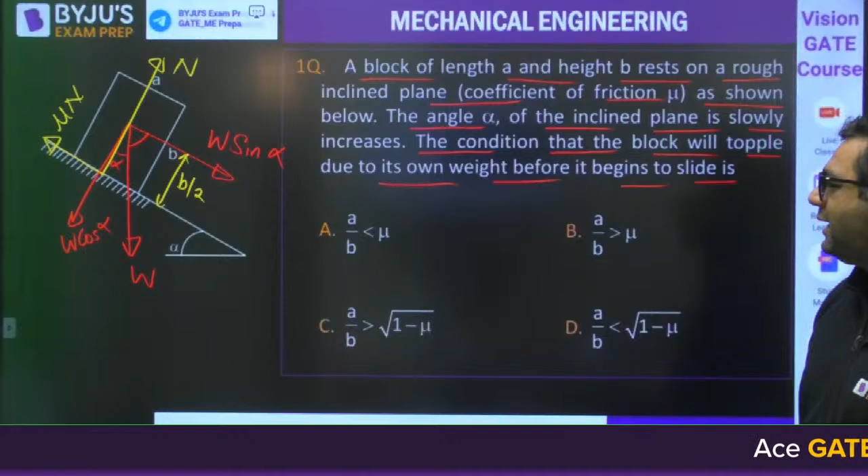So what you need to do, I feel everybody remembers that. Here we can write N is equal to W cos alpha, and mu N is equal to W sin alpha. They are asking you for the condition.

Yes, Papa Kagoda, good morning. Okay, so Mani has given the answer to be B, that is A by B more than mu. What about others? Good morning, bhai Kiran, how are you? Kiran is also saying the answer is B. Okay, let us see guys.

Let us see. So guys, you already know when I divide this, mu will come out to be tangent alpha. They are asking that the block will topple, so you know when the block will be toppling, that is the condition where only this point will be the point of contact. At that point, this is W sin alpha acting like this, and mu N is acting like this.

So you would be saying that is going to be mu n into B, mu n into B or B by 2? Okay, Kiran is saying A. Bengali Baba is saying A is correct answer. A is the correct answer.

So you know that this mu n is nothing but W sine alpha. Let me write it as W sine alpha into B by 2. And that is going to be equals to W cos alpha into A by 2. So when you do this, you would be getting A by B to be less than mu. This will be the condition for which it will get toppled down. So the answer is going to be A, guys.

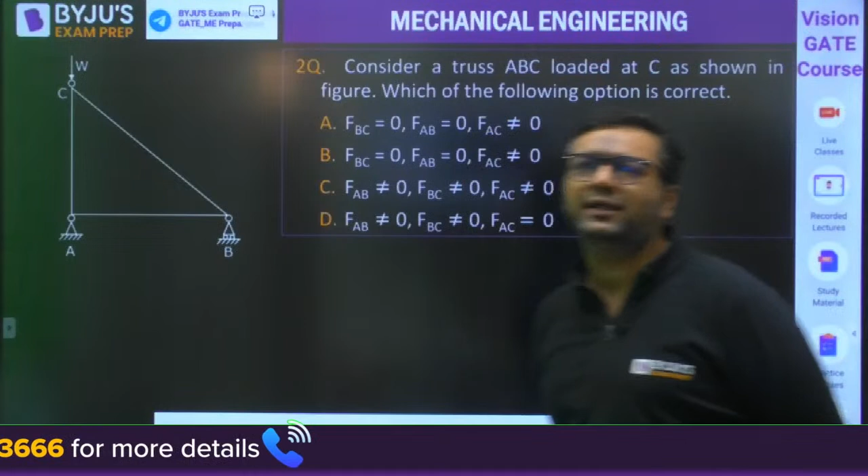Very good, very good. So moving further to the next question, guys. This is from the trusses. After that, we have questions from machine design, strength of material, thermodynamics, fluid mechanics. Every topic will be covered.

This is the second question. Consider a truss ABC loaded at C as shown in the figure. Which of the following options are correct? They are asking you the forces in the member. You need to apply the shortcut. This type of question will be coming in the exam.

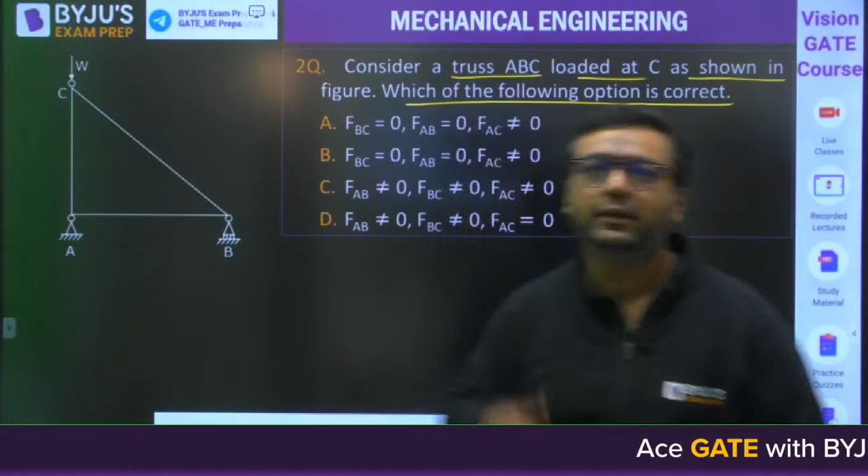Yes, the answer A is correct. Why it is correct, I am telling you. So my dear, you can see that this load W is acting and this is the member like that. So whenever we have this condition, let us consider that you have two members like that. Because in trusses, one member is a force member, every member is a two-force member. So force or member, both can be considered simultaneously.

So my dear, you can consider if this is a member, this is a member, they are collinear, and some other member is going like this. For such a condition, this becomes a zero force member. So my dear, here this will become a zero force member. If this is a zero force member, you know it would be having two components. Like if I assume this force to be like this, it would be having two components, one is this, other is this. This one will be balanced by the reaction. If this total is zero, obviously its components are also going to be zero. So this force will also be zero.

And this W will be handled by this member because in the collinear member the load becomes the same. So if this is W, it would be going to be FCA. So my dear, FAC or FCA is going to be W and all other loads are going to be zero. So the answer for this is going to be A, guys. Is it clear? Very good, Nikhil. Very good.

Moving further, guys. Now this is from strength of material, theory of failure. They are asking for a component subjected to complex loading. The dimensions obtained from different theories of failure are arranged in descending order. Which of the following statements is true? So they are asking you, the dimension obtained will be bigger by which theory of failure?

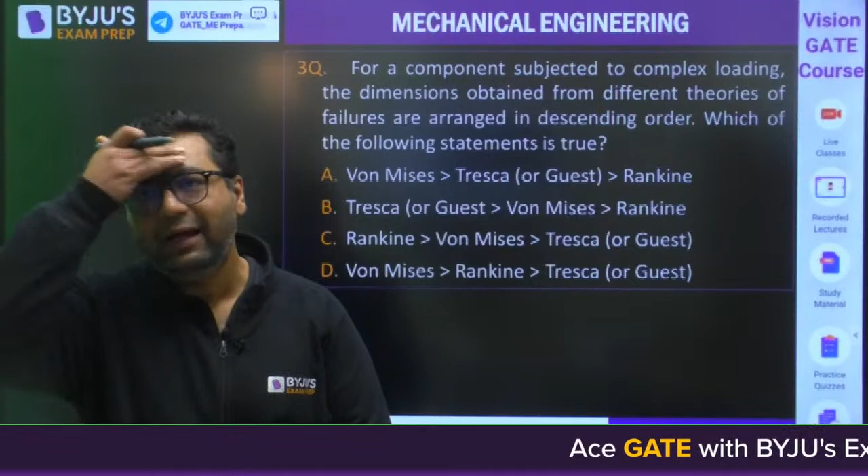Tell me, guys, tell me. Tell me, guys, tell me. Yes, everybody. Nikhil, Mani, Papa ka ghoda.

Okay, guys, so Mani is saying A. Nikhil is saying A. Okay, okay guys.

Whenever you have this type of question, first of all they are asking you the dimension. Which theory will give you the bigger dimension?

Whenever we are comparing von Mises and Tresca, everybody knows that when we go for the failure envelope, that failure envelope is going to be a hexagon. This hexagon is going to be for MSST.

Okay, Bengali Baba is saying B. So when we are talking about this, this is going to be a hexagon.

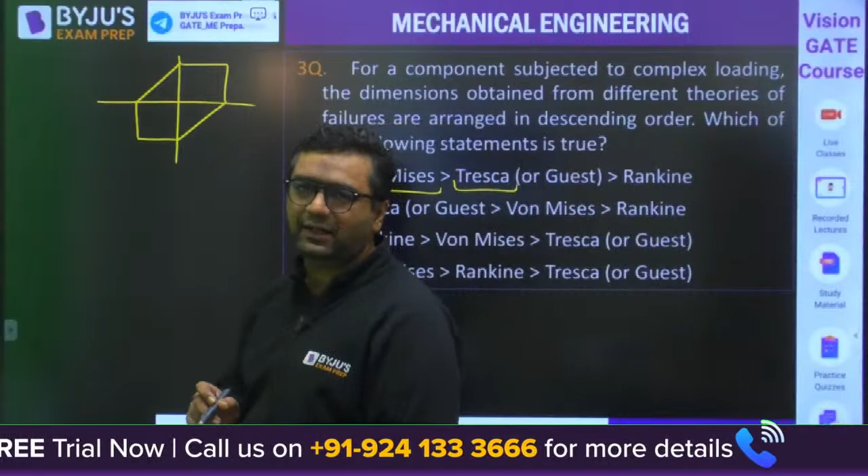You are aware that whenever we go for the second loading, just wait guys. Actually today I am taking the class on PDF, generally I take on PPT. So this is the MDET. You can see the failure envelope.

Is bigger for what? Is bigger for MDET. So MDET failure envelope is bigger than MSST.

So when failure envelope is smaller for MSST, it means it is restricting the loading to a lesser area. It is a more conservative theory. We always say MSST is the safest theory, and whenever we call it, it is uneconomical. So this is safest but uneconomic. And when we talk about MDET, we call it safe and economic.

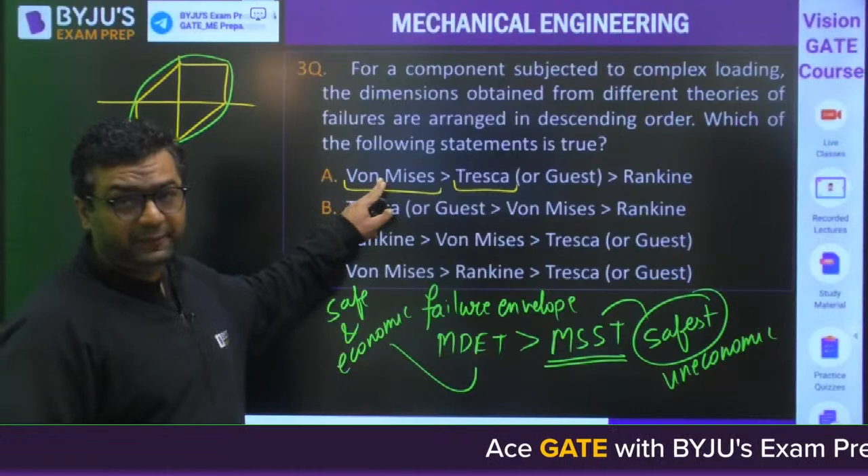If that is the case, it is obvious the theory which is safest will be giving the bigger dimension. So it is for sure that MSST will give bigger dimension than MDET. So von Mises is MDET, which means dimensions given by Tresca are going to be more than von Mises. So the answer will be B, not A.

The similar question I have kept once again, because I knew you would be giving the wrong answer here. So let us see who gives the right answer. Here they are asking the area enclosed by the failure locus on the plot of principal stresses: distortion energy, maximum shear, maximum normal. So which area is bigger, which is smaller? This is just similar to that question.

This is question number 4. I kept it intentionally because BARC people ask this type of question. Because here a calculator is there, some numericals will be there, but time is less. So some such questions will be there where they check your conceptual clarity, because they do major evaluation through interviews only. Here they just check your basics, so concepts would be asked.

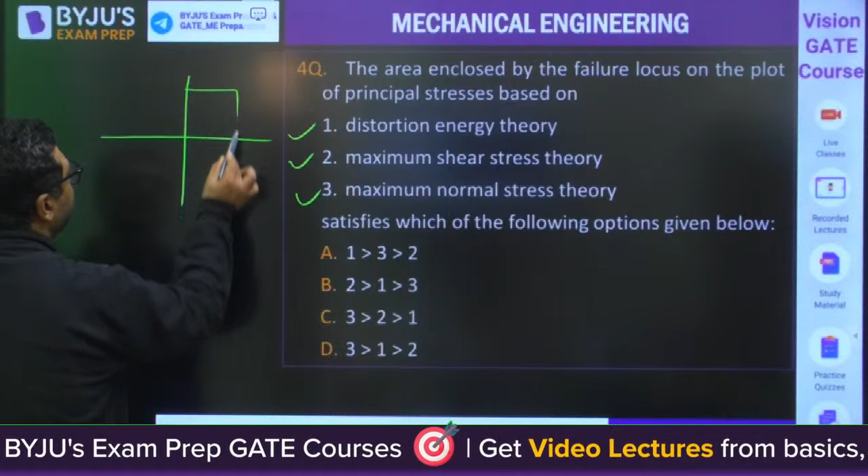Which area is bigger? I have told you one thing, that MSST is a hexagon like this. If MSST is a hexagon, MDET is an ellipse over it. And when you go for MPST, MPST is going to be a square like this.

So obviously MDET and MSST are part of this bigger one. What would be the answer for this? You can see this is for maximum normal stress theory. You must be knowing that MSST is also going to be part of this; the hexagon is like this. So you can see which one is bigger, which one is smaller.

What would be the answer? Nikhil, Mani, Bengali Baba, what would be the answer?

So guys, we will be having the maximum or biggest area for maximum normal stress theory. 3 will be having the highest one. So 3 is having the highest one.

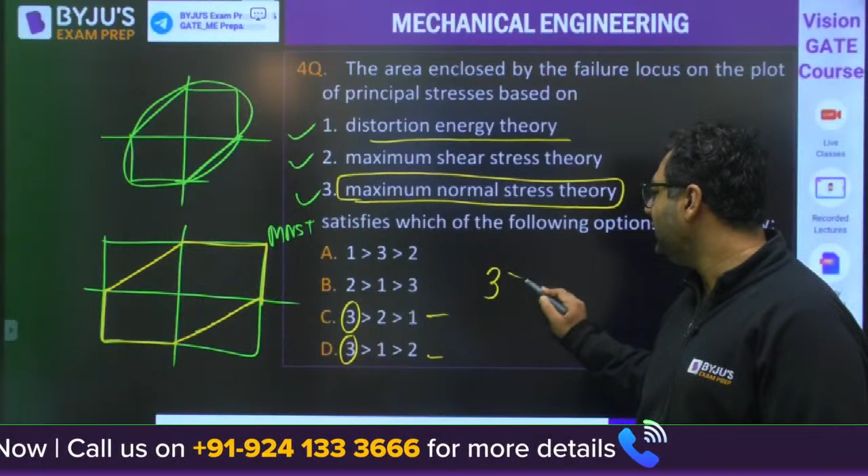So either C or D would be the right answer. Then it will be maximum normal stress theory, so 3, then we have 1, then we have 2. I feel you are not very clear about the theory of failure.

So the answer for this question is going to be D. Moving further guys, everybody understood now? This ellipse area is greater than this MSST area, so that is why the answer will be D.

Okay, now let us move to the next question guys. The next question is very easy from the joints, but here no calculations are involved. You just need to tell which of the bolts will be having the minimum shear force.

This is the figure. So Mani, Bengali Baba, Papa Ka Ghoda, please answer it guys.

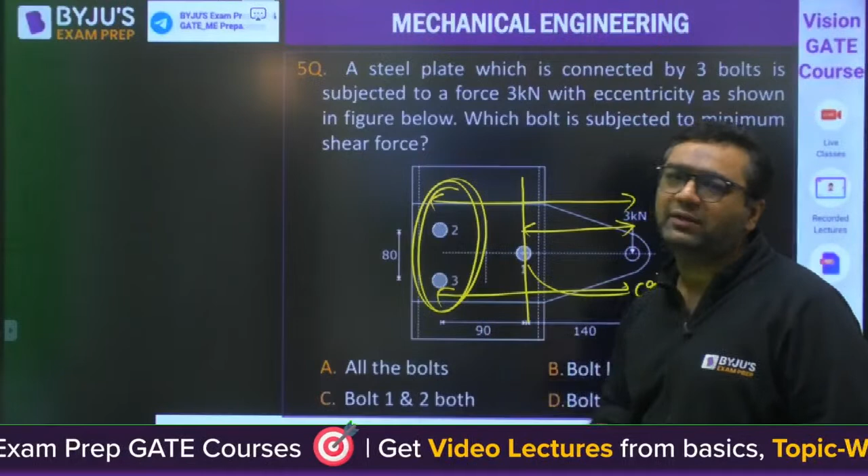And these two are at the same distance. So 2 and 3, they are going to have the less value of stresses. When we do the calculation, we found bolt 2 and 3 would be having the lesser stresses because they are at equidistant. So they will be having equal stresses. And this bolt 1 will be having the highest stress because it is near to the load. So the answer for this is going to be D. Very good, guys. Moving to the next question, question number 6.

Here some calculations are involved. They are asking you the maximum bearing pressure. So they are saying a 25 mm radius, 300 mm long shaft. So we are having a long shaft. Let us say there is a support. This is RA. This is RB. Because they are saying that it is supported at its ends by 2 journal bearings. A load of 2 kilonewton is acting at a distance of 200 mm from the left hand side. And total length is given as 300 mm. So here will be the load acting. So this is 200. This is 100. Because total length of the shaft is 300 mm.

Okay. So they are saying that the length to diameter ratio for the bearing is 1.5. So they have already given L by D is 1.5. So my dear, they are asking you the maximum bearing pressure. How to solve this question? You know there are 2 bearings, one at A, other at B. You will find out the support reaction RA, find out the support reaction RB. Out of that, select the maximum one that will give you the maximum pressure. Maximum pressure will be R max by L into D. So this is going to be the answer.

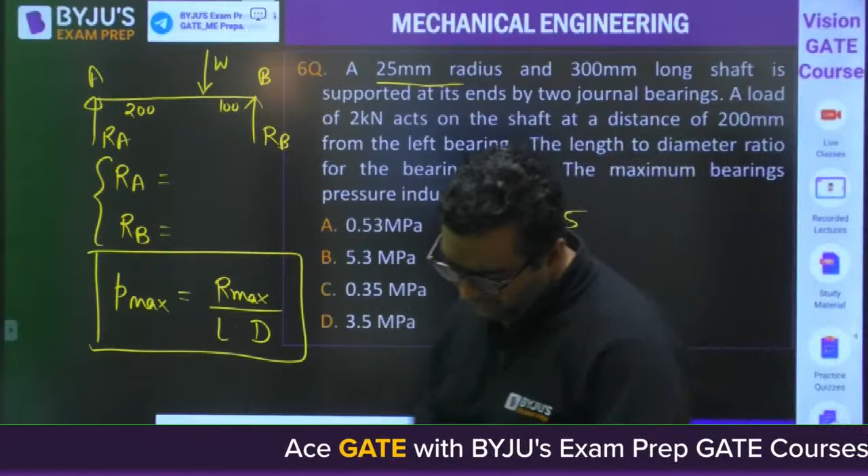What about others? Okay, Bengali Baba is saying 0.35 MPa. C is the answer. Sachin Gautam is saying C is the answer. And I would like to say C is the correct answer. Because when you will be finding out RA, you know that this is 200, this is 100. So it is L by 3, it is 2L by 3. So when you will be writing the value of RA, RA will be W by 3 actually. And this is 2W by 3.

I feel everybody is aware of the shortcut that we write load into distance from opposite end divided by total length. So that will be giving RB to be maximum. Yes, so RB to be maximum. So when you will be going for pressure maximum, RB maximum is 2W by 3. 2 into W, W is given 2 kilonewton, then by 3. Okay, divided by L into D. They are saying 300 mm is the length.

And L by D ratio is 1.5. You can use that also. Otherwise, they have given you the radius also. So you can put the value of diameter and you will be getting it to be 0.35 MPa. I am doing this class on PDF so that I can share the PDF with you.

Very good, Nikhil. Okay, moving to the next question, question number 7. This is a ball bearing question. Question number 7. So I have taken 50 questions from all the subjects, fluid mechanics, thermodynamics, every subject is covered.

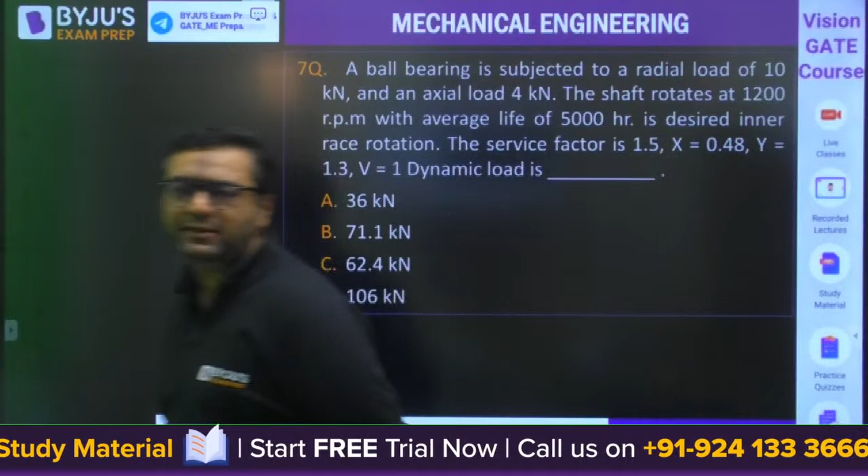So here this time they are asking the dynamic load. You already know the equivalent load is X V FR plus Y FA into S, and C by PE is L90 to the power 1 by K. Yes, K is going to be 3 for the ball bearing. It is going to be 10 by 3 for the roller bearing.

So they have already mentioned it is a ball bearing. So formulas are in front of you. I feel everybody knows that we are going to have the radial load as 10, axial load as 4, shaft rotates at 1200 rpm. Life L90, when you will be finding out, it is life in hours into 60 into rpm divided by 10 to the power 6. This will be the L90 calculation.

So you just need to find out what is the dynamic load. Dynamic load means they are asking you what? C. They are asking you the C. What would be the answer, guys? They are asking you the value of C, dynamic load carrying capacity. And I am telling you frankly, when you give the exam, this question you should attempt in the last because it is a lengthy question.

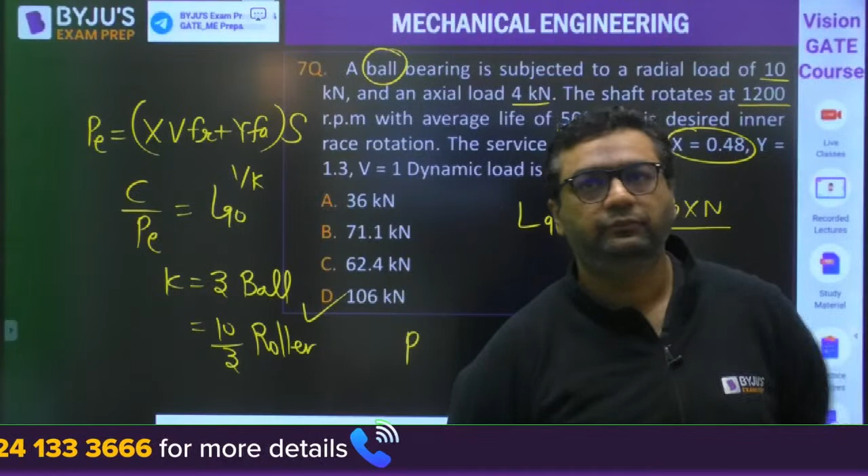We have completed 7 questions, guys. We are still left with 43 more questions. Clear, Mani? Shall we move on? One more question now from the gears.

106.7 kilonewton. So you would be finding out L90 from here, PE from here. And as it is ball bearing, you will select this value. You will get C to be 106.7. Moving further to question number 8. Here also I will give you the formula. Minimum number of teeth is 2 times AR divided by sin square phi. This is the formula for minimum number of teeth.

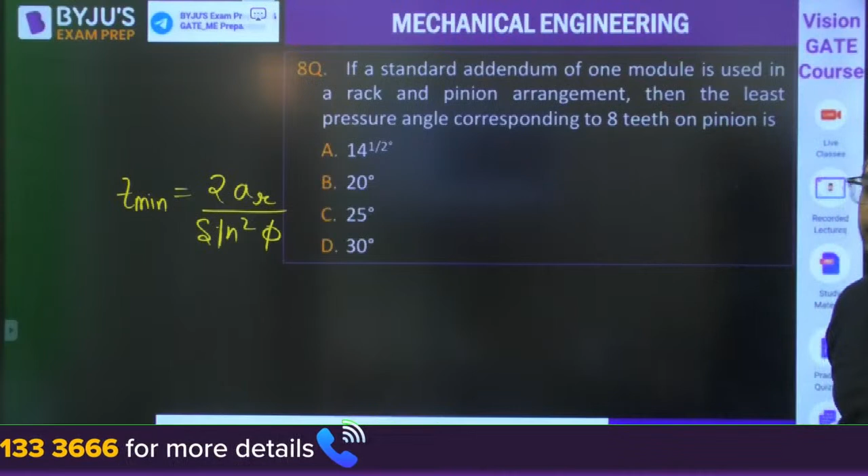Solve it. They are asking you the minimum number of teeth is 8, then the least pressure angle. Find out the phi value, guys. Very good, very good, very fast. Bengali Baba has said the answer to be 30 degree. What about others? Yes, Mani, Nikhil, Sachin.

So AR, they have given you the module is 1. Okay, so when you will be putting this value, you would be getting the phi to be 30 degree. D is correct.

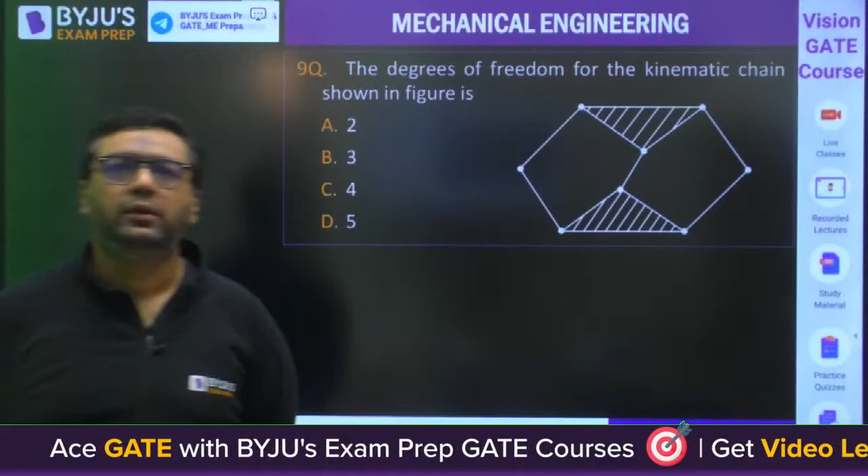Now degree of freedom. Question number 9, degree of freedom. Vinay, are you giving the answer for 8th question or 9th question? Solve it, guys. Now this is a question from theory of machines. After that we have thermal, fluid. Okay. Tangi Siva is saying D. Sachin Gautam is saying 2. Bengali Baba is saying 2.

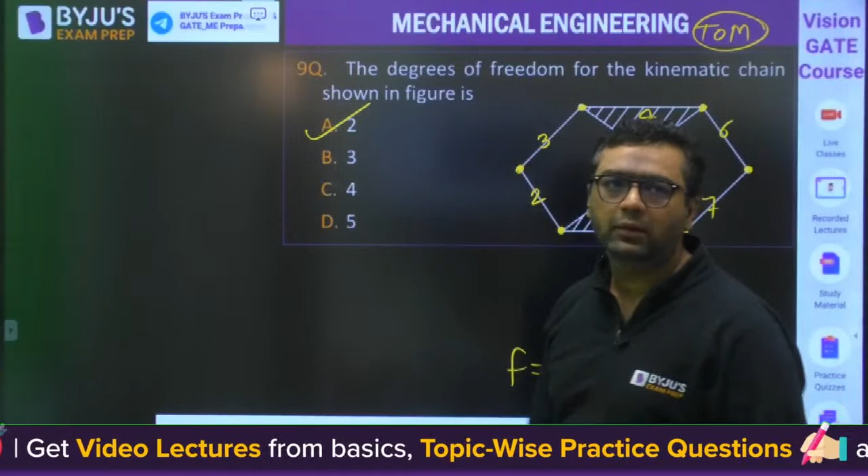Yes. So guys, this is link number 1, 2, 3, 4, 5, 6 and link number 7. So links are 7. Then you can see these are all binary joints. 1, 2, 3, 4, 5, 6, 7, 8. Number of joints are 8. So you know the formula is 3 into L minus 1 minus 2 into J, and higher pair is not there. Answer will be 2. 2 is correct answer. Wonderful, guys. Very good, Nikhil, Mani.

Moving to question number 10, guys. This is from planetary gear trains. So guys, here you can apply the algebraic method. Tangi Shiva, actually I would like to tell you, whenever this question is given, you are saying this is not fixed. You must have seen many times we are applying F is equal to 3 into L minus 1 minus 2J minus H. So whenever you are talking about that, you would be going for the condition of kinematic chain.

In some of the books you may have seen that when one link is not fixed, we will be going for 3L minus 2J minus H. But dear, don't go by that, because when you derive the kinematic chain, then also you are going to get this expression, because you are using J is equal to 3 by 2 L minus 2. You use it, na?

So this is coming from here only. So always use that, because that is given in some of the books. If one link is not fixed, you should use this. But if you see in all the questions till now, whatever they have asked, you need to use this equation to get the answer. Yes, it should be correct when one link is not fixed. But whenever we are finding out degree of freedom, we are generally talking about when one link is fixed. Otherwise, it is of no use.

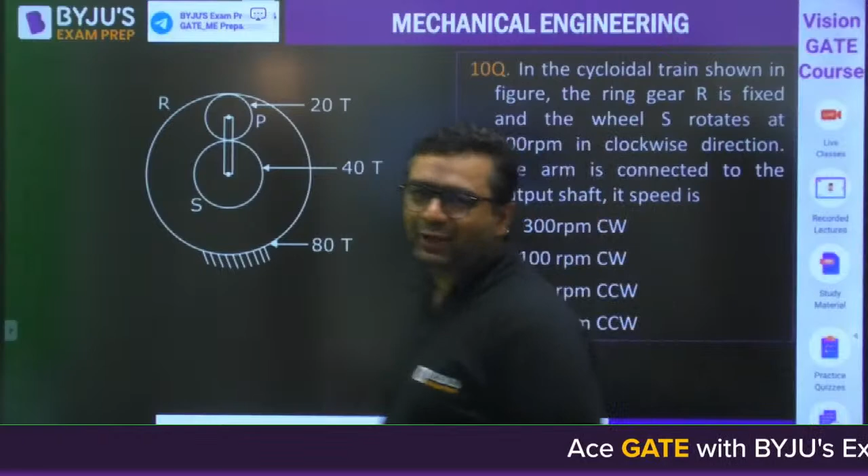Okay, so if you don't have 2 in the option, then you should go by that formula only, because in the PSU exam such kind of things can happen. Is it clear? Yes. I know that. That's why I told you, because many students would be going like that. But as I said, sometimes they don't give it. If they are already showing the connection, sometimes they don't mention the link to be fixed.

So in the cycloidal train shown in the figure, the ring gear R is fixed and the wheel S rotates at 300 RPM in clockwise direction. The arm is connected to the output shaft. Its speed is? So guys, here I would tell you how we can solve it very easily by the algebraic method. So for the algebraic method, there is a formula, like if we are going to have sun and planet in the external gearing.

So we can write (NS minus NA) by (NP minus NA), that will be equal to minus TP by TS. This is one formula. Planet and ring are in the internal gearing: (NP minus NA) by (NR minus NA), that will be equal to TR by TP. Why did the minus sign not come? This is external, this is internal. In external, if this is clockwise, this will be anti-clockwise. In internal, if this is anti-clockwise, this will be anti-clockwise. So there is no minus sign.

Now you know that these NP minus NA are equal. So you just multiply these two equations, and they are asking you NA, they have given ring gear fixed, you will directly get the answer. It is going to be a very easy question then. So Mani has given it to be B. Bengali Baba is also saying B.

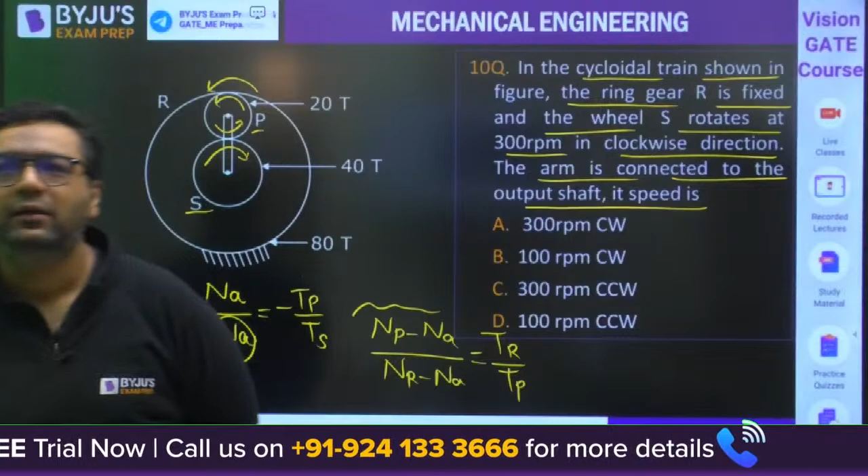So the answer for this is B. First of all, they have said that the sun is rotating in the clockwise direction. So 100 RPM clockwise or anti-clockwise, they are asking for the arm. So you would be getting NA to be plus 100. Plus 100 means clockwise. Okay, when you multiply these, this and this will get cancelled out. I can show you if you want.

So we can write (NS minus NA) by (NP minus NA) into (NP minus NA) by (NR minus NA). So when you equate it, you get minus TP cancelled out, giving TR by TS. You will be getting NA as 100. Very good, Vinay. Moving to question number 11 from flywheel.

Moving to question number 11 from flywheel. Very good. Tangi Siva. Question number 11. 10 questions are over, 40 more to go. And guys, don't worry, easy questions will come.

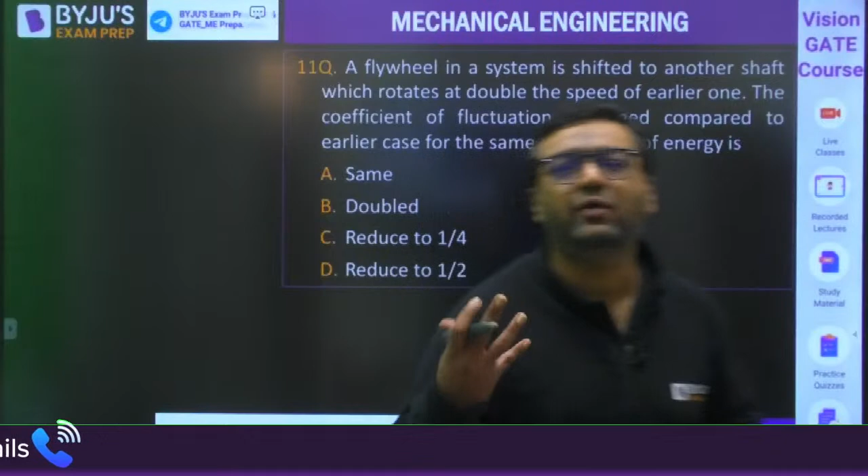I have kept calculative questions intentionally in the initial phase. Because in the paper, I want to tell you, if you find calculative questions, do them in the last, because first it is necessary to cover the entire paper. You would be getting at least 30 questions which you can solve without much calculation. In the rest 20, calculations would be required. Here it is not in your hand, because you see the question which I will be showing, but in the exam it will be in your hand. So go through the entire paper first. Go for those questions first where calculations are not required; you can solve them fast. After that only think about the other questions.

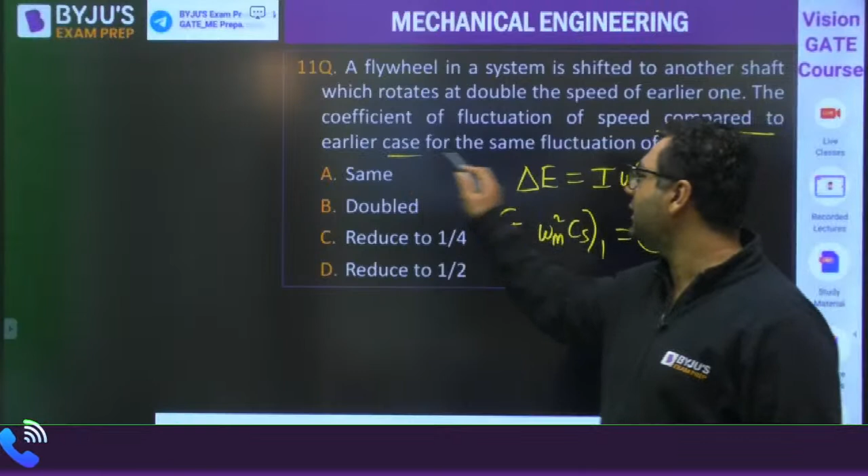Okay, Zakhmi is saying C. Mani is saying C. So guys, for this condition, you will consider delta E equals I omega mean square CS. So you just need to equate I omega mean square CS1 and I omega mean square CS2. Why? Because they have mentioned compared to the earlier case for the same fluctuation of energy. So my dear, delta E is the fluctuation of energy.

So you know, as the flywheel is same, I will get cancelled out and you would be getting it reduced to 1 by 4, because omega 2 is going to be 2 times omega 1. So CS2 will be 1 by 4 of CS1. So answer is C. Very good.

Moving to question number 12, guys. This is from CAM. This is also a famous question from CAM. So now questions from theory of machines are going on. We have seen questions from machine design, engineering mechanics, some from strength of materials, some more will come from strength of materials, fluid mechanics, thermodynamics. Solve it, guys. What would be the answer? Question number 12.

Easy question. They're asking you jerk. You just need to differentiate it 3 times. Differentiate it 3 times.

Hello Abhishek, how are you? Okay. So Bengali Baba has said answer to be C. C or A? Okay, Tangi is saying B.

So dear, first of all, they have given you X = 10 theta + 120 theta square + 1500 theta cube. First of all, let us differentiate dx by dt. Then you would be having dx by d theta into d theta by dt. So the answer will be 10 plus 240 theta plus 4500 theta square, this is 240 into d theta by dt. Then this is going to be d square theta by dt square. Okay, I have done some mistake.

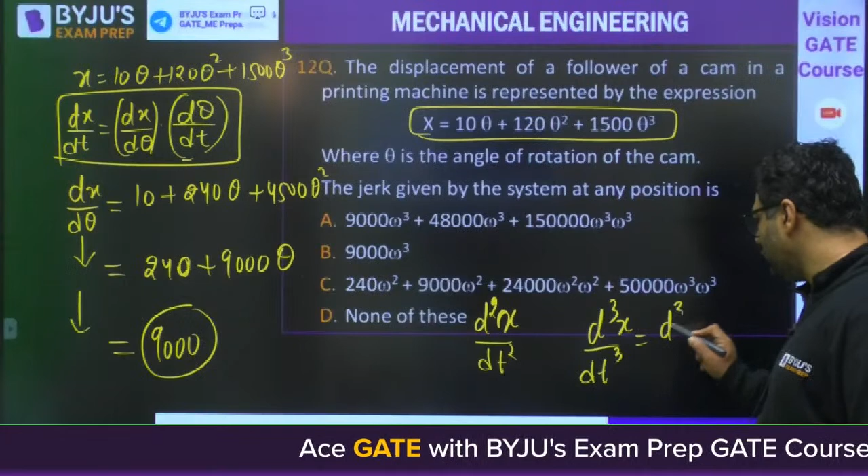So you are going to have 9000, and dx by dt is the velocity. To get the velocity, you have written dx by dt. To get the acceleration, you will write d square x by dt square. And to get the jerk, you will write d cube x by dt cube. So you would be getting d cube x by d theta cube into d theta by dt cube. This is nothing but omega cube, and this you have got 9000. Answer will be B for this.

Very good, guys. Moving to the next question, question number 13 from vibrations. You are doing nicely. Still many questions are left. You can also count your marks, how many questions you are doing correctly. Out of 50, if you are scoring 35 plus, you are on the safe side.

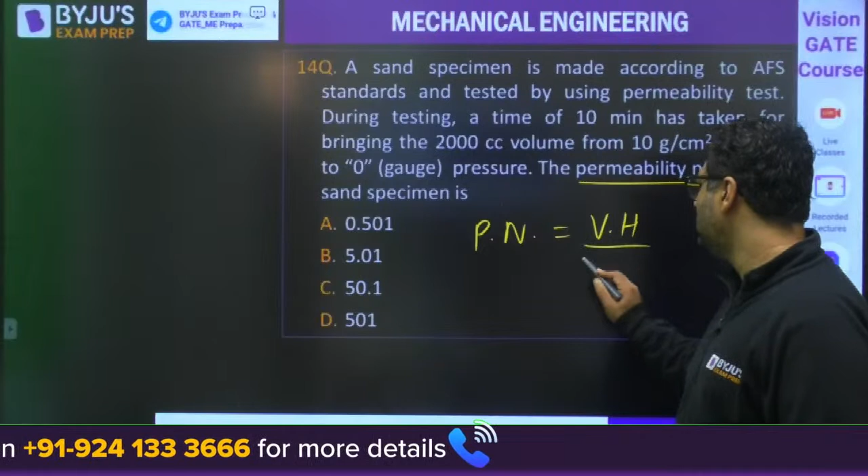Very good, guys. Moving to question number 14. This is from casting. Now production is coming. They are asking you the permeability number. I feel everybody knows permeability number is given as VH by PAT. Try to solve it.

Question number 14. Still left with 36 questions. So if you are getting 35 out of 50, you are on the safer side. So count your marks, how many questions you are doing correctly, and at the end, if possible, you can disclose. If you don't want to disclose, no problem. You can disclose separately also to me.

Yes, guys. They have given the volume of air to be 2000 cubic centimeter. They have given you the height or not? If they don't give, they mention AFS standards. Then diameter and height of the cylinder is 5.08 centimeters.

Yes. So Bengali Baba is saying 5.01. What about others? What about others? This is question number 14. Yes. What about others? Nikhil, what you say? Mani, what you say? Tengi Siva, what you say?

Permeability number. So my dear, it is volume of air in cubic centimeters, height in centimeters, then delta P in gram per centimeter square. A is pi by 4, 5.08 squared. TF, time required to fill the cavity, they have mentioned it as 10 minutes. Yes, that would be your answer. And 5.01 is correct. You would be getting B.

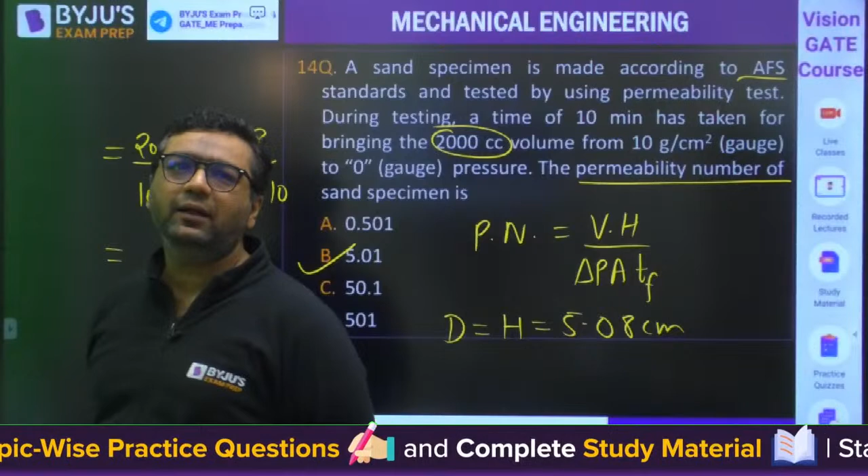Are we getting 5.01? Mani, you are giving the answer when time is 1 minute. When time is 10 minutes, answer will change. I told you that questions have been changed. They are not taken as it is. Okay. Answer is B for this. So moving to question number 15.

This is a question where no calculations are required. They have given the material INVAR, which you have seen at two places. In strength of material, when you were studying thermal stresses, you knew the alpha value for this is 1.2 into 10 power minus 6 per degree Celsius. And then you also have studied it in metrology. There, when you were talking about the gauge material, you were using INVAR and ELINVAR. They are preferred there also.

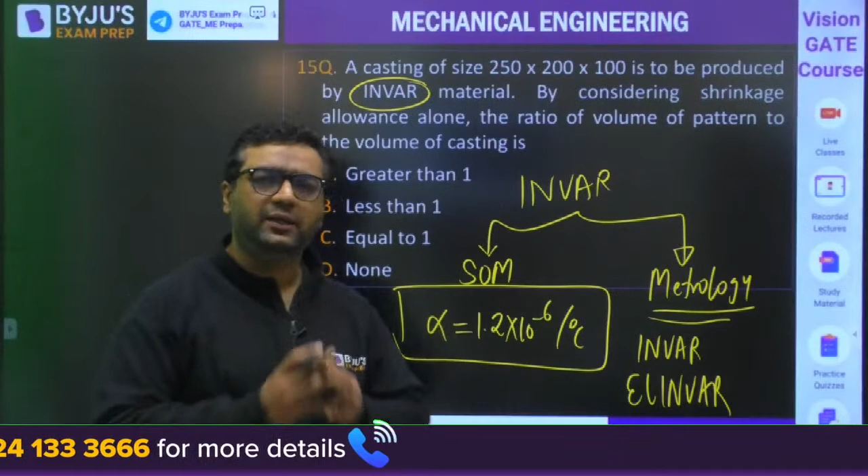Everybody knows that INVAR is having very less value of alpha. Because of that, expansion is not going to be much higher. Contraction is not going to be much higher. So shrinkage allowance is not required. That is why it is going to be equal to 1. C is the right answer. Moving to question number 16 from production.

Very good. So the same like we are writing for INVAR, the similar thing is there for one more material that you need to tell me. What would be the answer for question number 16? This is from welding. They are asking the most suitable for manual metal arc welding.

Some of you may be thinking, sir, you are taking all the subjects. अरे भाई हमने भी एग्जाम उस समय पे निकाले हैं तो सारे सब्जेक्ट पढ़े ही थे. मे बी अब पढ़ाते पढ़ाते we are majorly concentrated on some subjects. But at your age, we also have studied all.

Okay, what would be the answer for this? Kumar S is saying A. What about others? This is a very good question. For manual metal arc welding, you know there is a problem of slag inclusion. To solve that issue, we want the change of current, di by dv, that value should be minimum.

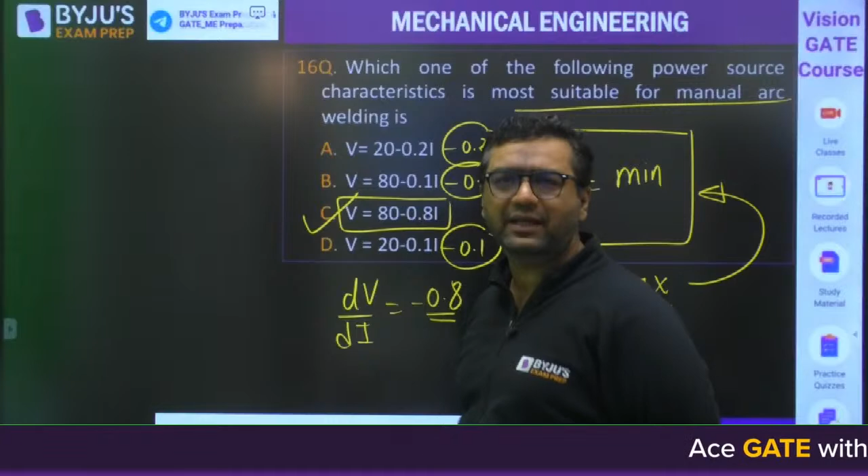For manual metal arc welding, we want... Bengali Baba, you are correct, highest in steel, but we were looking for the minimum. So like INVAR, I was asking which is the other material where we have less value. Don't worry, I will tell you at the end. So answer for this is C.

Everybody understood? In manual metal arc welding, you use a drooper, constant current transformer. Why? Because for more change of voltage, the change of current should be lesser. That means dv by di should be maximum and di by dv should be minimum. So answer for this is C. Clear to everyone? Moving to question number 17. This is a metal cutting question.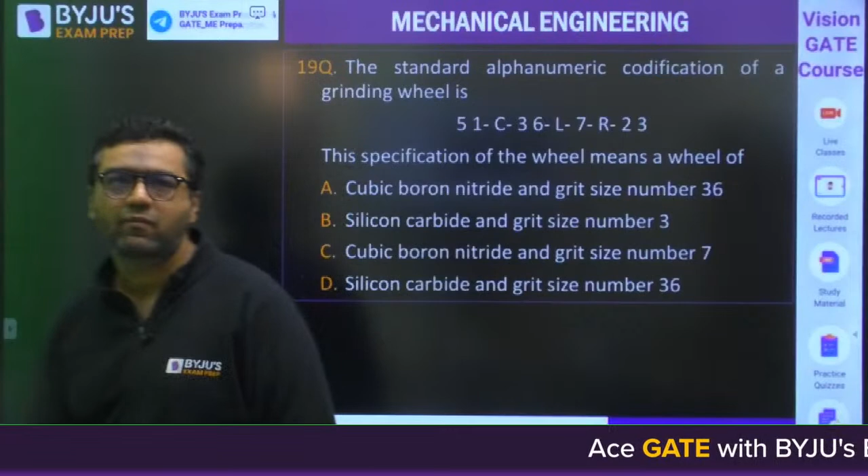The answer for this is B, 150 Newton. I feel you just need to put the value of FC phi, FT phi, you will get the value. They have given the cutting force as 600, so 600 cos 60 minus 173 sin 60. The answer will be 150 Newton.

Question number 19, question number 19. This question is, guys, for grinding. They have given you the specification for the grinding tool, and now you need to answer what is the difference. 51C, 36, they are telling us.

Aisha is saying A would be the answer. What about others? What about others? Mani is saying A. Yes Salman, I know that. Actually I feel Rakesh sir was not well, he got dengue, that's why maybe he did not conduct it, but now he's okay. I will surely request him on behalf of you.

So dear, what would be the answer? This is question number 19. First of all, dear, I would like to tell you that this C does not denote cubic boron nitride. This C denotes silicon carbide. This C denotes silicon carbide. A denotes aluminium oxide, C denotes silicon carbide. If you have confusion on this, don't worry, after this class I will share with you the complete table of which word denotes what. There is confusion among students, so first of all, silicon carbide is the notation for C.

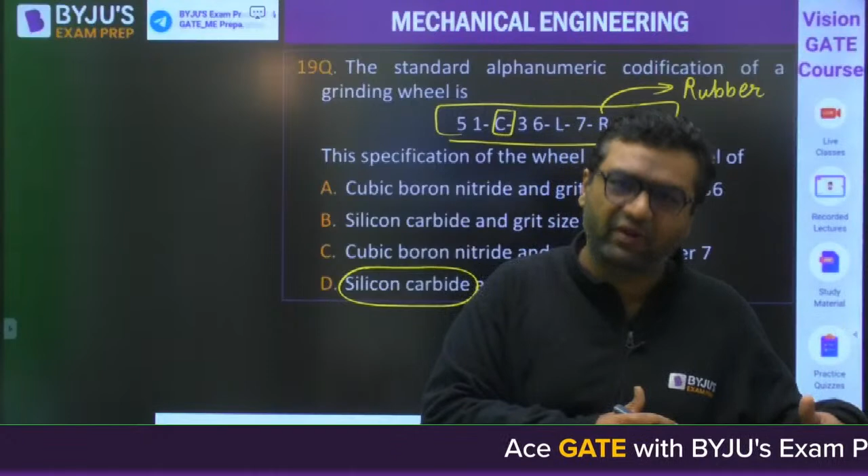Then, my dear, they are saying grit number 36. If you want to know, this R denotes rubber. This R denotes rubber, here also confusion is there. There is one more thing, resinoid. So rubber came first, so rubber was denoted as R. Resinoid came after that, so resinoid was given a different notation. So there is confusion because they feel R means resinoid. It is not like that. So likewise, C denotes silicon carbide actually. So the answer is D for this.

So 51 is the manufacturer code, C tells us the abrasive, 36 will tell us the grain size number. This will tell us, L will tell us about the grade of the wheel. Grade means whether the bonding material is weak or strong. Left of this is everything about the grit particle, right of this is everything about the grinding wheel. So question number 19, this is D.

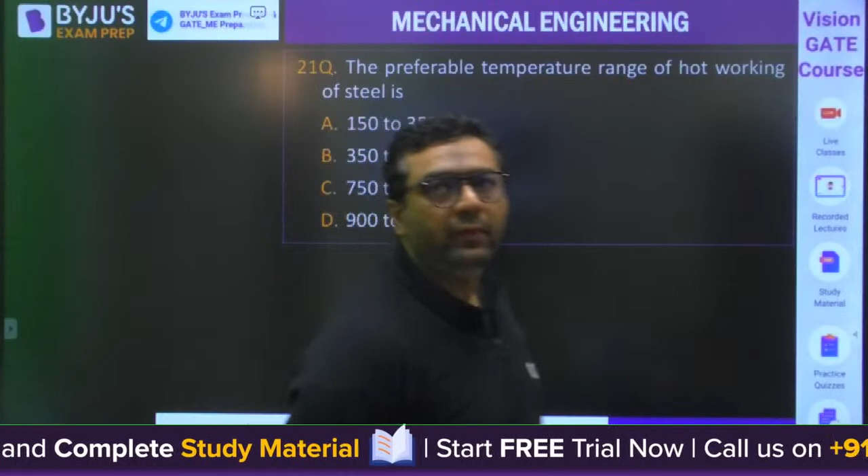Moving to question number 21, once again from metal forming. The preferable temperature range of hot working of steel is - in which temperature we shall go for the hot working. Tell me, this is an important question.

This can be considered. Okay, no issue, I am telling you, I was aware that you would not be able to answer this. Intentionally, I have taken this question because it has already appeared in engineering services, ISRO, DRDO. So there are chances it can come in BARC. GATE also has asked similar to this.

So my dear, 400 to 700 degrees Celsius is generally the recrystallization temperature range. And I would like to tell you that when we talk about these two ranges, we never operate steel in these two ranges, because in these two ranges, whenever you increase the temperature, SYT increases in place of decrease. That is the different behavior of the steel. So these two ranges we never opt for.

And when we are talking about this, this is generally the range of recrystallization. So we want preferably hot working, so we will go for more than 850. So we would be going for option D. Is it clear for everyone? Clear for everyone? Yes, so we would be preferably going for more than 850.

More than 850, yes. Moving to next question, sheet metal operations.

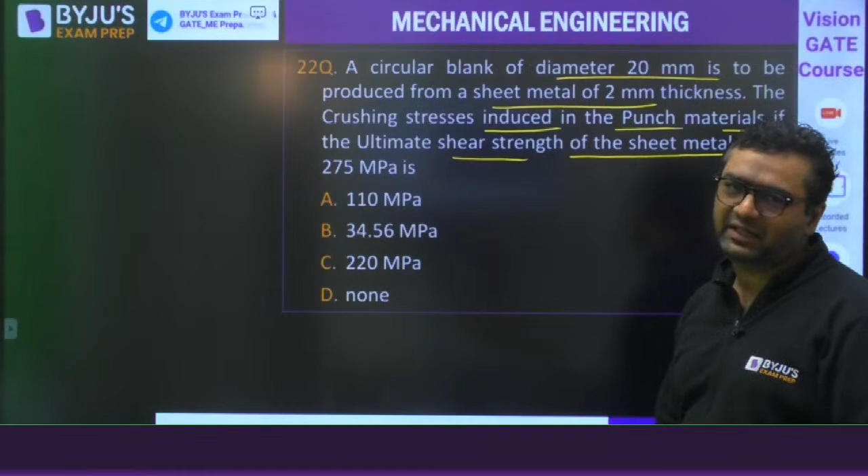Okay, so next question is: a circular blank of diameter 20 mm is to be produced from a sheet of 2 mm thickness. The crushing stress induced in the punch material if the ultimate shear strength of the sheet metal is 275. So you know what we do actually here?

This is 275 - what is this? This is the ultimate shear strength, SUT, of the sheet is given to you, and they are asking you the sigma crushing.

Okay, so Aisha, you understood the previous question? Does everybody understand this question? Actually, in these two ranges, the behavior of steel is opposite. So on increasing temperature, SYT will increase in place of decrease. So we don't operate in these two ranges. And also this temperature range does not fall in the recrystallization temperature range. So if that is the recrystallization temperature range, we want to go beyond it, no? So that is why we are preferring this.

Clear for everyone? The melting point of steel is 1539 degrees Celsius. And one more reason, at this temperature you will be getting gamma - gamma means austenite, FCC structure. Okay.

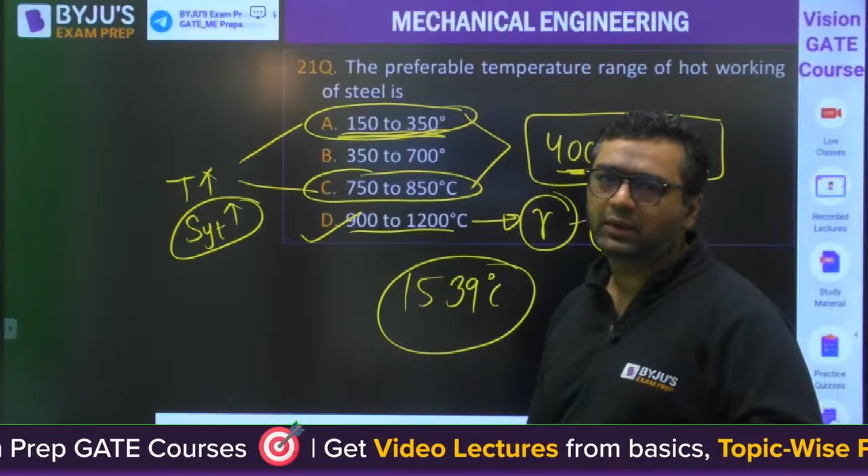Everybody understood? Steel is FCC from 900 to 1400. Okay, otherwise it will be showing BCC - iron I am talking about. But when you add carbon, obviously some changes will happen.

Question number 22. If you don't remember the formula for this, you can go for, like, you know, this is the sheet, this is the punch. So when the punch applies the force onto the sheet, the sheet will also apply the compressive forces onto the punch. So sigma crushing into pi by 4 d square, and that is equal to tau ultimate into pi d t. Just equate them, you will be getting the sigma CR.

Okay, Tangi Siva has given the answer. Yes, Aisha, Kumar S, Mani - it is question number 22, I have calculated for you. Very good, Tangi Siva. What about others? 110, 220, 34.56, or none? What would be the answer for this?

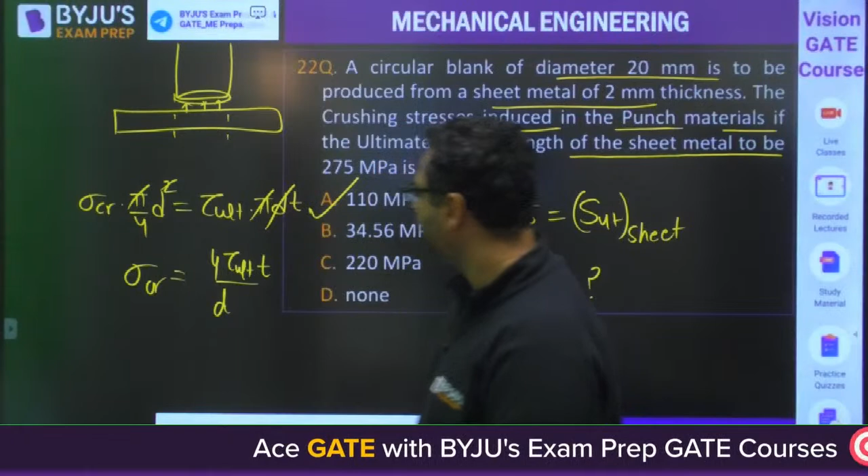Very good, A is correct. Mani has also given the answer. So D and D will get cancelled out. Okay, you would be getting 4 tau ultimate, pi cancels out, T by D. Answer will be 110.

Everybody got it? Shall I move to the next question?

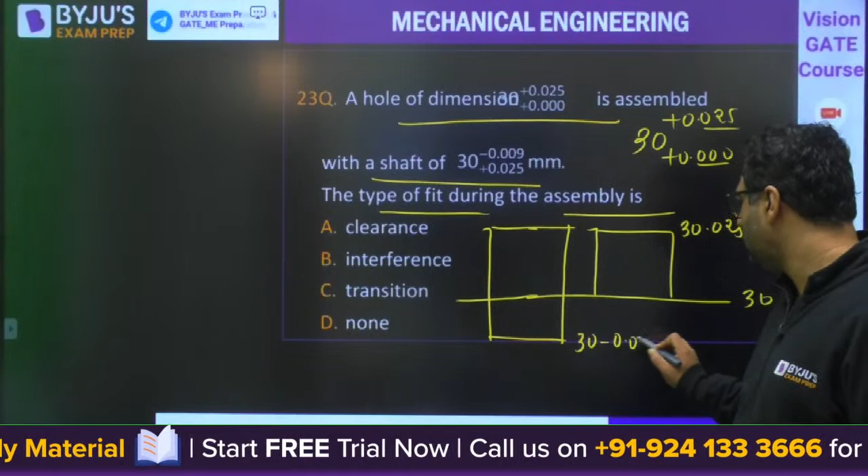Tangi Siva is saying C, transition fit. Let me show you. This is 30 plus 0.000 plus 0.025, and always we show up to 3 decimal places because we can see up to micro level from the microscopes. This is the hole dimension, so it is H type of hole. Basic size is 30, and 30.025. Then they have given the shaft dimension. So my dear, you can see if you take this size of shaft with this size of hole, you will get clearance fit; if you take this size of shaft with this size of hole, you will get interference fit. So the answer will be transition fit, because when we get sometimes clearance and sometimes interference, the answer is transition fit. Answer will be C for this.

Question number 24, this is from CNC. In the last test I have not included any question from CNC, so here I have included a question from NC-CNC.

Tell me the answer: the machine tool in which the point-to-point numerical control system is applied. Point-to-point can be applied where machining should not be continuous. What is the right answer?

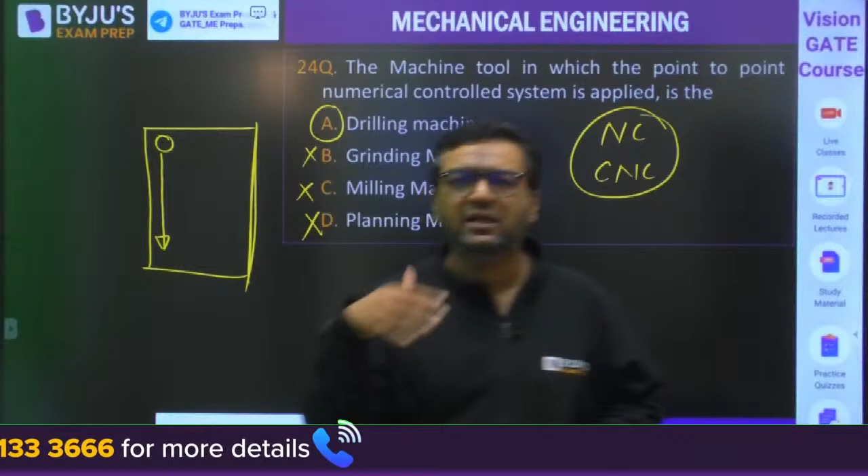Tangi Siva is saying D. What about others? So let us say we are having this surface to be machined. Out of these, which process has nothing to do with travel along the workpiece? When you go for planing, throughout the motion cutting is happening, so it can never be the answer. Same is with milling, same is with grinding. The answer is A, because point-to-point means: let us say you need to produce one hole here, so drilling will produce one hole here, and after that, while moving to the second point, there is no touch of tool with the workpiece. There we use point-to-point, because we give the instruction to the tool to move from this point to this point without any machining. So that is why the answer for this is drilling machine.

Everybody understood? You will have this type of question in the exam, because NC-CNC is a topic students generally leave. Keeping that in mind, I have planned to come up with a marathon session specifically on NC-CNC and computer integrated manufacturing, so that you can be very clear about this.

Question number 25, non-traditional machining method. In the USM, the relative material removal rate increasing order.

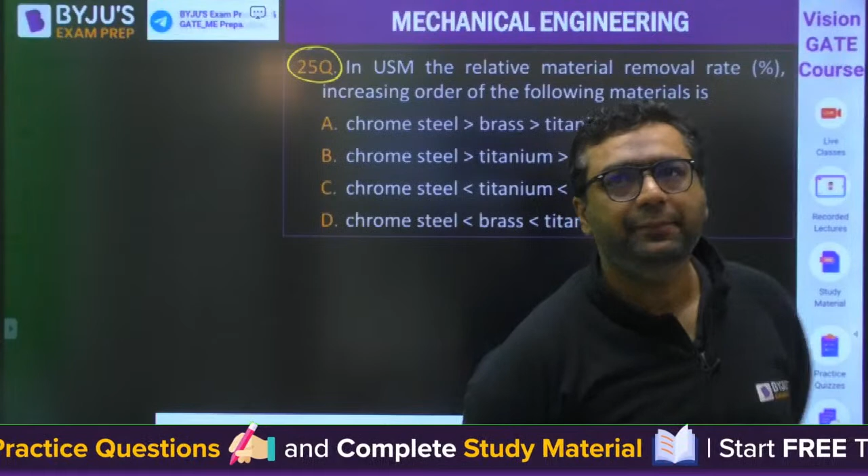Still 50% questions are left, guys, I am telling you. Mani is saying D is the answer, and that's not correct. Because whenever we talk about this, material removal rate will be more if machinability is more. Glass is the easiest to machine, so A and B cannot be the answer. Now option C or D can be correct. After glass, brass is easy; after that titanium; after that chrome steel, which is the hardest one. So C is the answer. Mani, your try was good, but the answer is C. So the order is: first glass, then brass, then titanium, then chrome steel.

Moving to question number 26, industrial engineering. All types of questions will come in the exam, be ready for that, and you may get some question as it is also. This is a very easy question from industrial engineering.

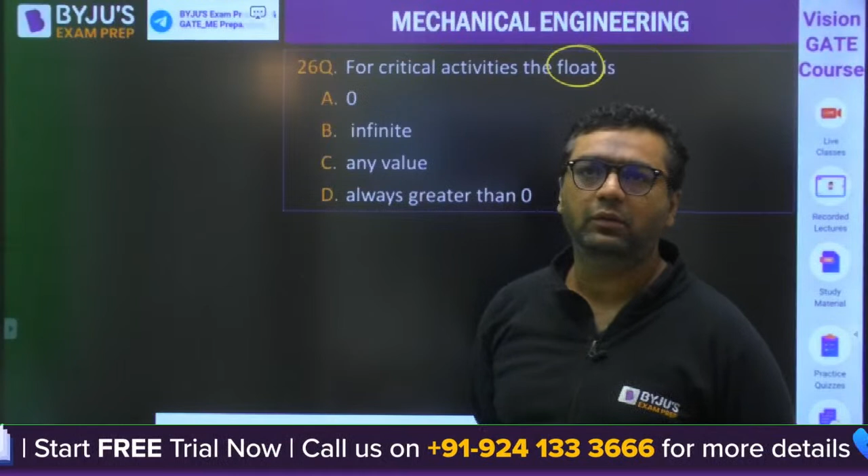For critical activities, the float is... Tangi Siva is saying A. What about others? For critical activities, all the floats - total float, free float, independent float - all are 0. A is the answer.

Moving to question number 27: during crashing of networks, the activity which can be considered for crashing - critical activities only, non-critical activities only, critical activities and those that become critical during crashing, or all of the above.

Very good. So Tangi Siva is saying C, Mani is saying C.

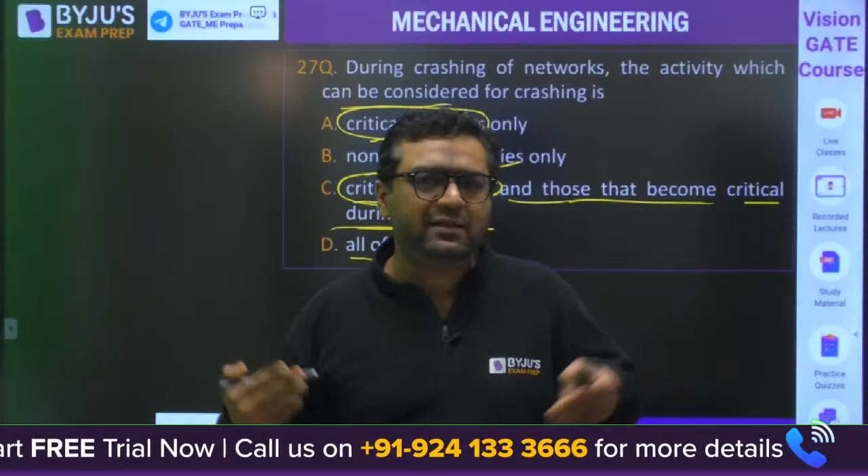Because you will see in the first stage we go for critical activity crashing, then critical path time reduces and critical paths are increased. Initially there is one critical path, after crashing you may have 2 and 3 critical paths. Then, my dear, at that time those activities which were non-critical will become critical. So now in the second stage of crashing, you can crash those also which were previously non-critical but now are critical. So the answer should be C for this.

Moving to question number 28, material science. You can see the variety of questions. I am covering every topic. Which of the following hardening processes is not generally used for steel? Nitriding, cyaniding, induction hardening or age hardening? This type of question you can answer by elimination. Nitriding, cyaniding and induction hardening are all done on steel. So only D, age hardening, is not done on steel.

Moving to question 29. 28 questions are over, 22 are still left. Now we have the last question from material science, then we will enter the next topic, fluid mechanics. Following elements have face-centered cubic. About one I have just talked about: the gamma iron, for which I told you the temperature range 910 to 1400. Only in this range gamma iron follows this behavior.

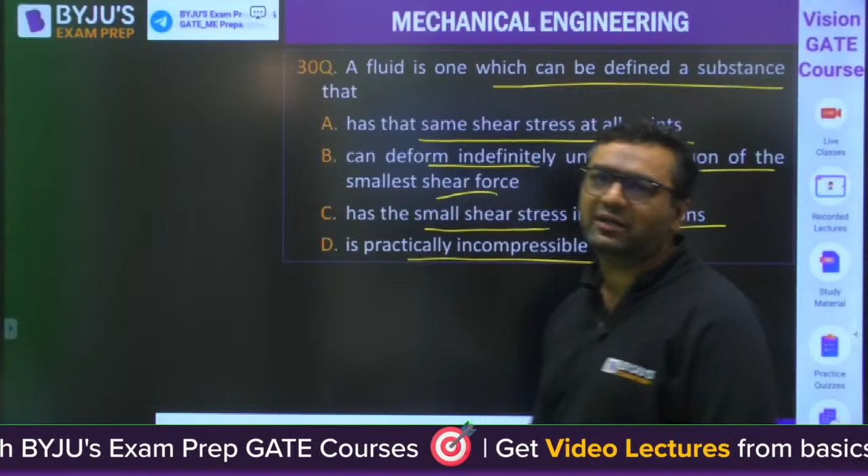Kumar S is saying B. Tangi Siva is saying B. Mani is saying B. Yes, fluid can deform very easily under the action of even a small shear force. B is the correct answer. Moving to question number 31.

This is a good question. The velocity components in the x and y direction of a two-dimensional potential flow are u and v respectively. Then del u by del x is equal to? Continuity equation in 2D. Is it the continuity equation in 2D? Am I correct? Tell me that.

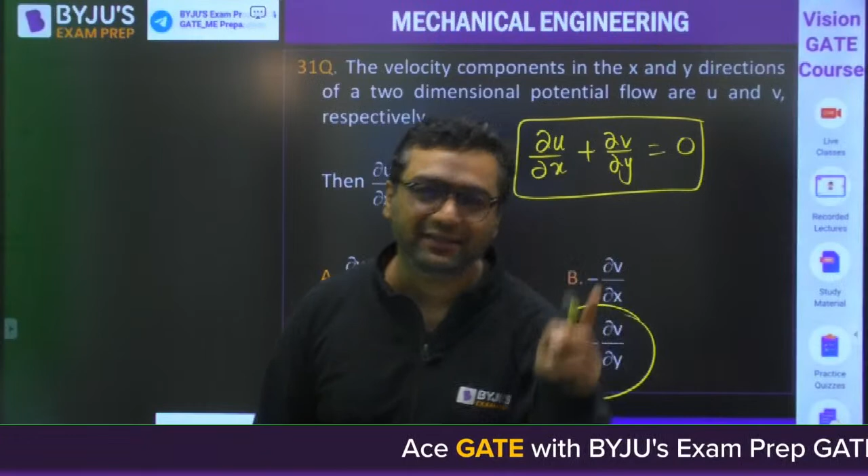I have chosen the questions in such a way that some are from previous BARC exams. This is from the information of the students. After every exam, I talked to the students, asked them the questions, noted them down, and that's why I know what kind of questions can come, because from that only we can have the idea.

This is a good question. Navier-Stokes equation represents the conservation of energy, mass, pressure, or momentum? This question has appeared in ISRO, in BARC, and in GATE.

Okay, so Bernoulli equation is conservation of energy. Conservation of momentum is which equation? It is Navier-Stokes. So answer is D for this. And yes, conservation of mass is the continuity equation.

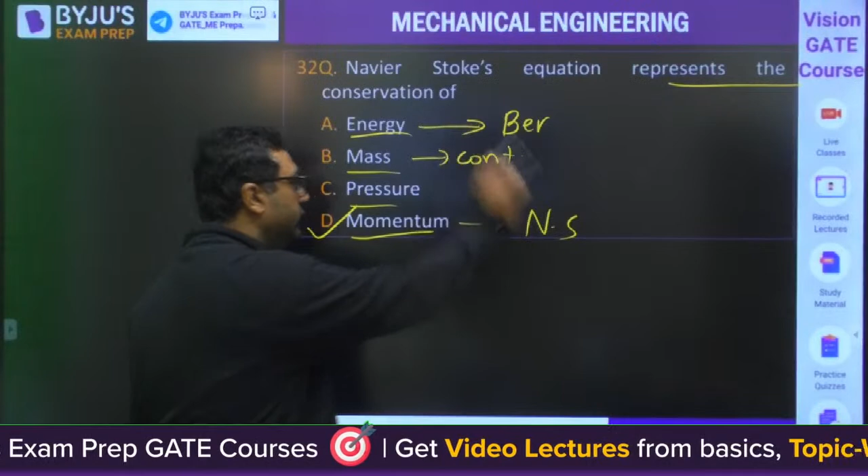Some easy questions are there now after difficult question. That's why students are actually leaving the questions. They are stuck into difficult question and they forget about the other question. That's why when you go for the exam, first solve those questions which you can answer just by looking at them. Maybe 10-15 questions are like that. And you will feel that 30-40% task you have done just by looking at it for the first time. That will save your time. Then go for the questions which have calculation but you are sure about them. And at the last go for the question where calculations are involved and you are not much sure about that.

In certain heat exchanger, both the fluids have identical mass flow rate specific heat, CH equals CC. The hot fluid enters at 76 degrees Celsius, leaves at 47. And the cold fluid entering at 26 leaves at 55. The effectiveness of the heat exchanger. Solve it. Question number 34 it is, guys. After that 16 more questions. Yes.

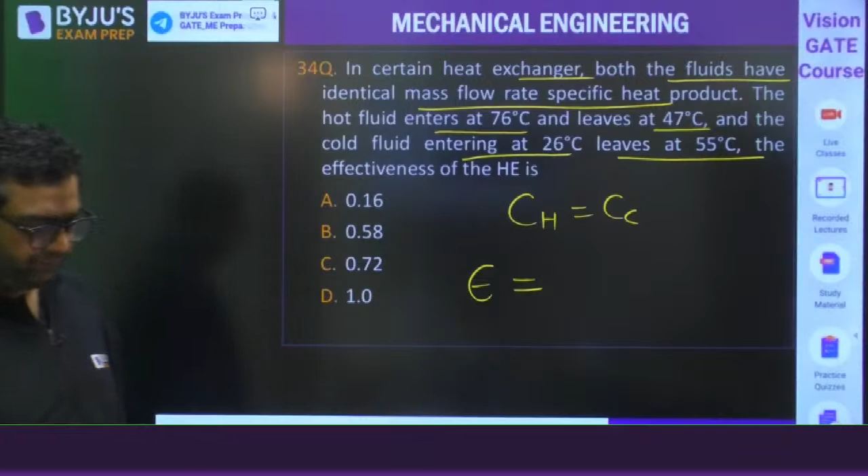It will be CH, TH, what it is, C minimum into what? As both are equal, CC will get cancelled out. Try to give the right answer for this. When you will solve it, this will get cancelled out. And effectiveness will be coming out to be, I have calculated for you. B is correct. You will be getting it to be 0.58.

Moving to next question, 35. This is from thermodynamics. Clausius inequality. I have made the first paper slightly difficult. This paper is slightly balanced. Next paper will be as per the exam level. Rohan is saying B is the answer.

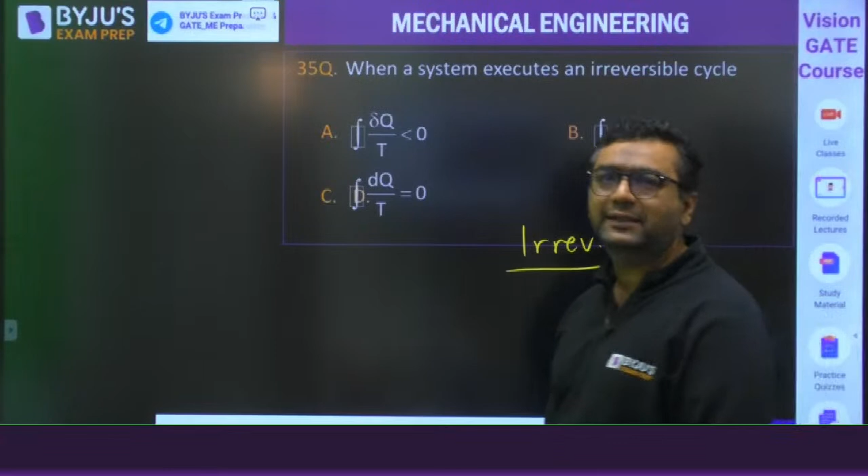For irreversible. Tangi Siva is saying A is the answer. What about others? dQ by T is less than equals to 0 as per the Clausius inequality. And we know that this is equals to 0 for reversible. Less than 0, irreversible. More than 0, impossible. Answer will be A. Yes. This is from Clausius inequality.

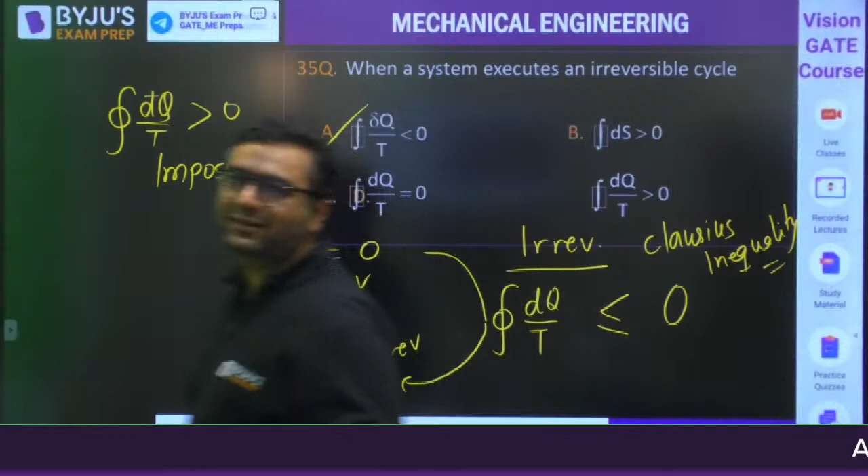Moving to question number 36. Pure substances. Constant pressure lines in the superheated region of the Mollier diagram. Mollier diagram means what? HS. Constant pressure lines. They diverge from each other. What would be the answer for this? This is question number 36. Use this equation to get the answer.

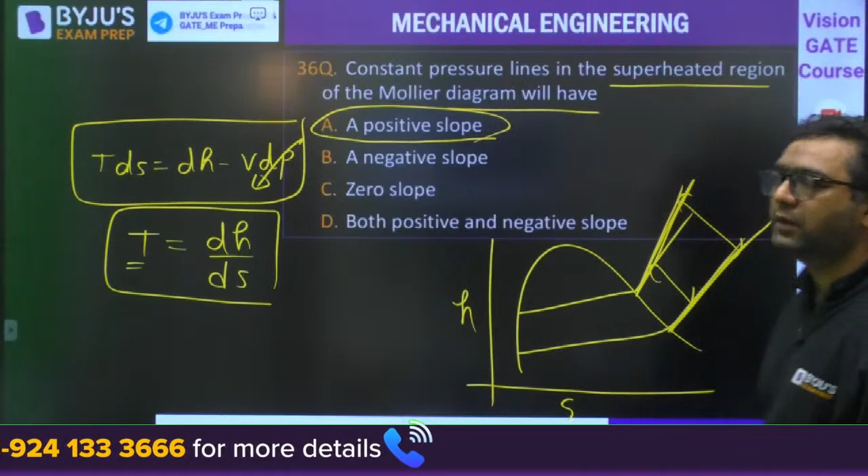Okay, Aisha. So when you say constant pressure line, dP will be 0. So T is dH by dS. The slope of the diagram is temperature. In the superheated region, temperature is positive and increasing. So answer is positive slope. Moving to question number 37. Absolutely Rohan, you are correct. Question number 37. 13 more to go.

Okay. So guys, I have tried to make a balance: the subjects from where difficult questions were there in the last session, I have made easy. Last time's easy question subjects I have made difficult. So definitely I have given you all the taste, and third paper will give you much more taste. So be ready and enjoy the session completely. 13 more questions to go.

So guys, whenever we are talking about the throttling process, temperature will decrease, quality will increase. Because when you see this process, the dryness fraction increases. Dryness fraction is considered as the quality of the steam. So that is why quality increases. Everybody got it? I am not making it on the diagram because it is an easy question. Shall we move on? Next question is related to power plant.

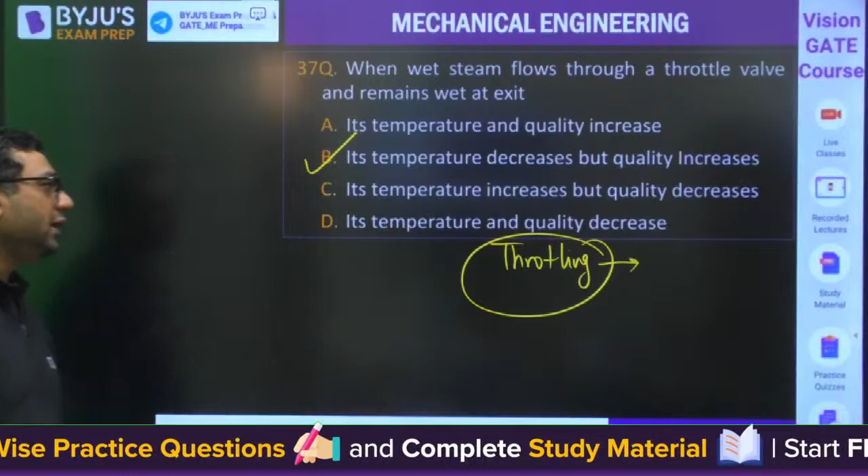If you may be thinking these are easy questions, you won't believe this type of question even comes in GATE, BARC scientist exam, everywhere. The thermal efficiency of an air standard Brayton cycle in terms of pressure ratio RP, gamma is Cp by Cv, is given by. This question was even asked in GATE 2014 and BARC 2018 exam. Okay.

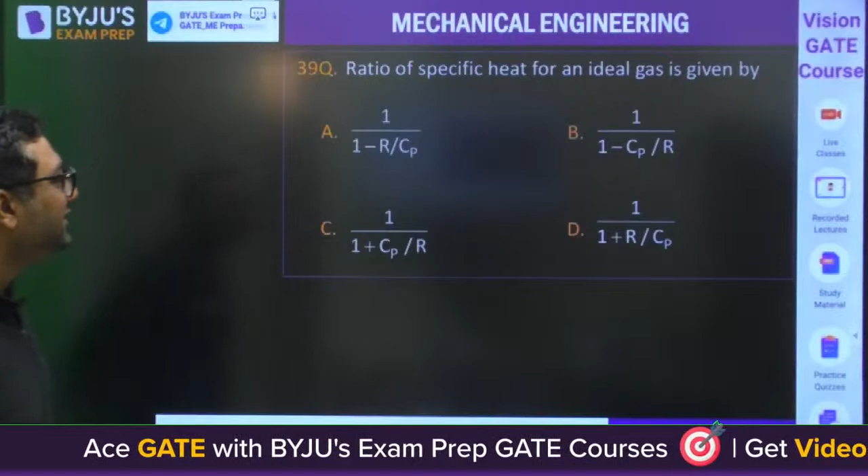This is from thermodynamics, ideal gases, 39. Very good question. You can see they have given the ideal gas. Cp minus Cv is equal to R. Yes, solve it. They have given the ratio of specific heats, Cp by Cv. Cp by Cv. Solve it. This is question number 39. Yes.

You know that from here you can write Cv is Cp minus R, or Cp is Cv plus R. And you also know gamma is Cp by Cv. What would be the answer? D or B? D or B? Or A? Yes. What are you getting? A? Are we getting A?

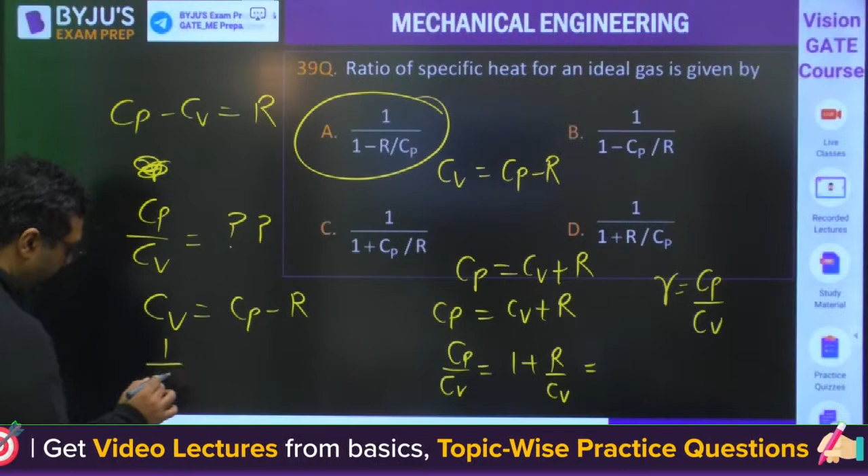If you write Cv as Cp minus R, so 1 by Cv as 1 by Cp minus R. Now Cp by Cv will be, you will be getting A. A is the right answer. So just multiply it with Cp. You will get Cp by Cv. It is Cp by Cp minus R. Now divide numerator and denominator by Cp, you will get A as the right answer.

Moving to question number 40. Thermodynamic relations. Clausius-Clapeyron equation.

Tell me. Just wait. Let me manage the sound. Just wait, guys. Just wait for a minute, guys.

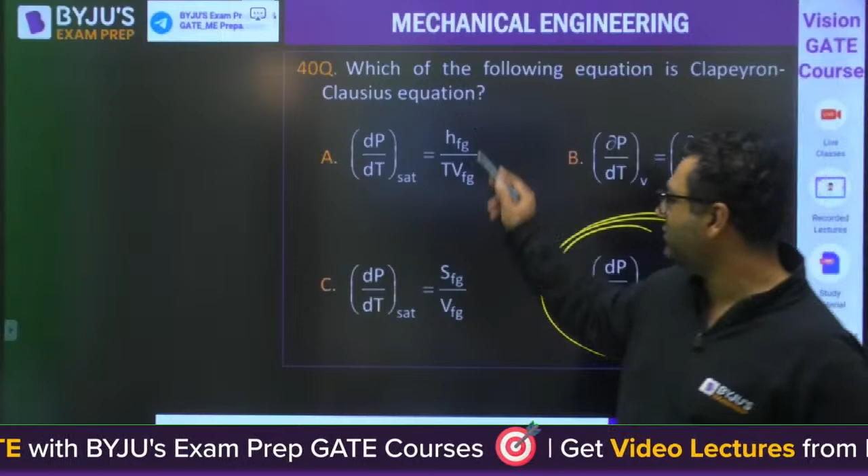Question number 40 it is. They are asking dP by dT saturation. Is it del S by del V? Is it hfg by T vfg, sfg by vfg or P hfg by RT square? Yes, this is your homework. Moving to question number 41.

This is the mixing of two air streams. This is from air conditioning. Because you guys have said A and C for both. Please check and then answer it, because it is MCQ, one answer you need to give. So answers for question 41: the mixing of two or more streams of moist air in air conditioning processes is isothermal, adiabatic, isobaric or polytropic? What would be the answer? This is air conditioning.

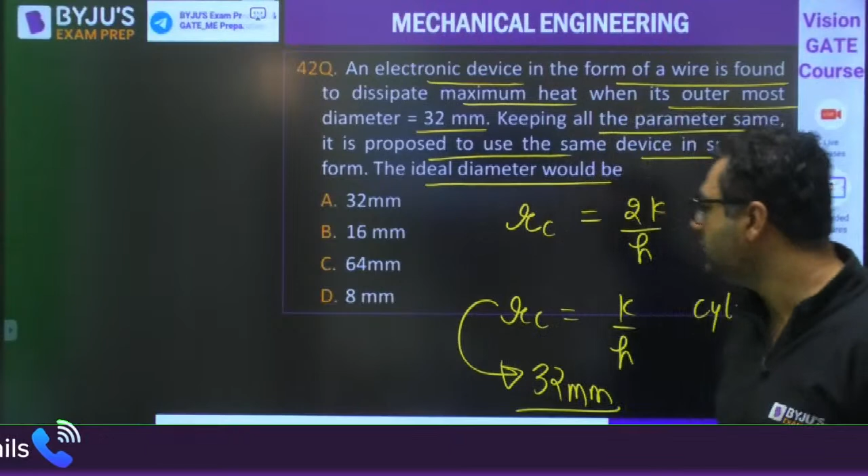This is also a good question from the critical thickness, critical radius concept. 64 will be the answer, na? It is 32. It is proposed to use the same device in spherical form; the ideal diameter would be... So ideal means this concept. Moving to question number 43, guys. Fluid mechanics again, the head losses question.

Yes. Tell me what would be the answer for this. The formula I have written for you for the head losses: FLQ square upon D to the power 5.

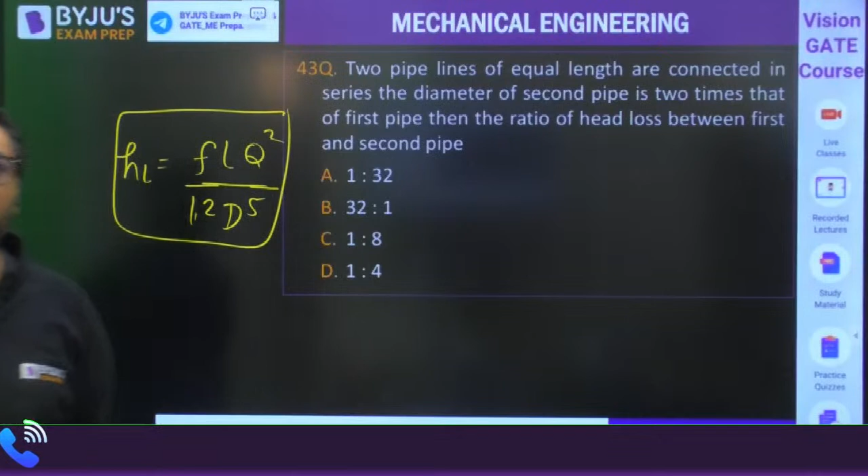They are saying two pipelines of equal length are connected in series. The diameter of the second pipe is 2 times that of the first pipe. The ratio of head loss in the first and second will be? Yes, is it 32:1? 32:1, because you can see HL1 by HL2 is D2 to the power 5 by D1 to the power 5. 32:1. Answer will be B for this.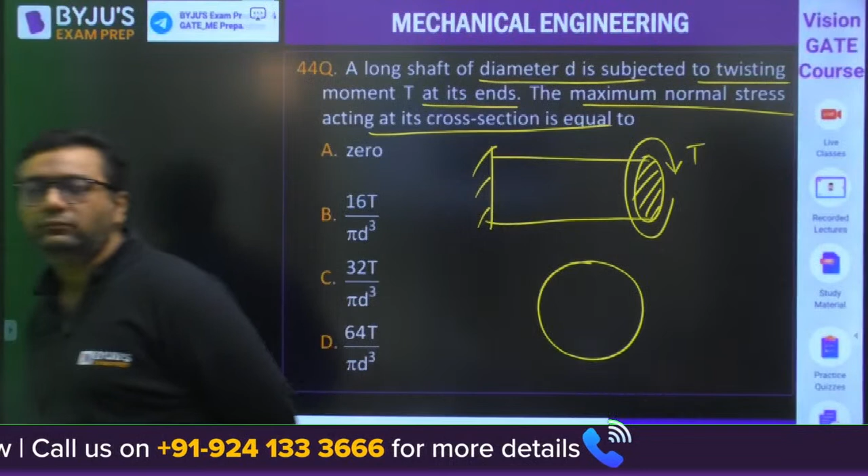A long shaft of diameter D is subjected to twisting moment T at its ends. So you are having a shaft. This is strength of materials now. We are having the twisting moment T. And mind it, they are asking the maximum normal stress acting at its cross section. At cross section, what would be the maximum normal stress? Yes, Kumar S is saying A. What about others?

If you see, you make the shear stress distribution on this like this. And you know, for this we call it a state of pure shear. We also denote it like this. So normal stresses will be there at other planes. At cross section it is going to be 0. The cross section is the plane of pure shear. At other planes, if you take some other angle, you would be getting normal stresses. But at the cross section it will be 0.

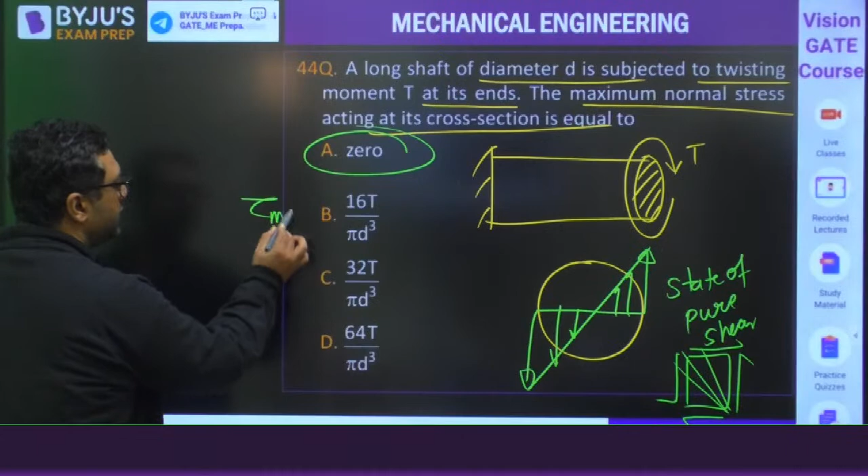At the cross section, this is the shear stress. Clear? That's why I said look at the words at cross section. Cross section is subjected to pure shear. At any other plane, normal stress would be there. Question number 45. Shafts in series.

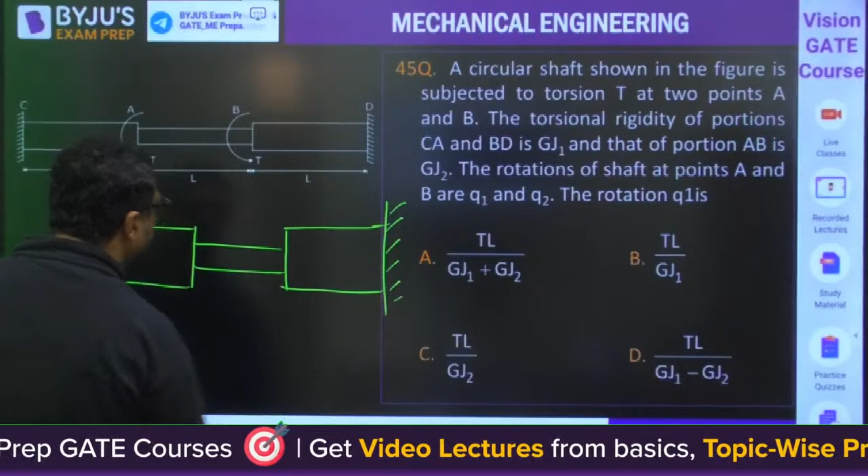Yes, question number 45, 5 more to go. So this is the case of shafts in series, guys. You can see they have given the twisting moment like this. So by symmetry, as this and this shaft are the same, if this is T, this reaction will also be T, and this reaction will also be T. So from that, this is GJ1, this is GJ1, this is GJ2. What would be the right answer?

When you take this section to the left hand side, torque is T. So you would be writing theta is T1 L1 upon G1 J1, that is TL upon GJ1. B is the right answer. Moving to the next question, guys. 46. Shear stresses in beams.

The shear stress distribution for a particular cross section is given. It is for which section? Tell me the answer.

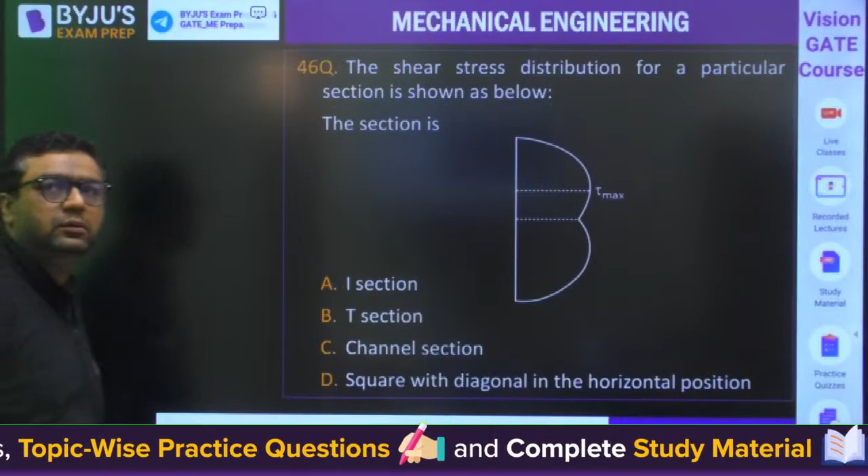Answer is D for this. Very good. So this is going to be for this section. You know that we will be following the triangular case. For triangular, it should come like this. But here it is not ending, that's why it will be following like this. So the answer is D. Very good, guys. Moving to question number 47.

47 is a question from bending. They have given you the value of I about the neutral axis. They are asking the maximum tensile stress. You can see hogging moment is there, so the beam will be bending like this. This fiber is in tension, this is in compression. So bending stress will be My upon INA.

Bending moment is 3 meganewton meter. We are interested in magnitude. Y maximum will be, you know, where tension is there, on this fiber. So 1/3. INA will be 1/36.

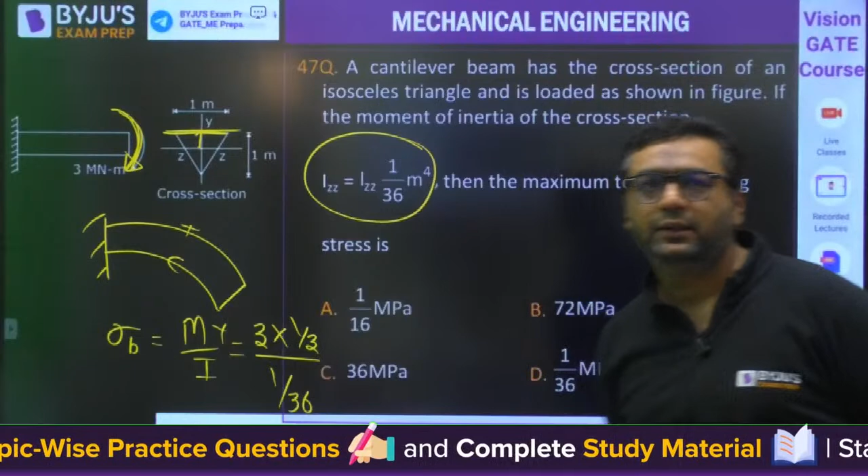Okay. No issues. The answer for this is B or C. Look at it. They are asking you the tensile stresses. If they do not mention the tensile, then the answer is B. You know, in the bottom fiber, we will have compression. They are asking the top fiber. Answer will be C. If they don't mention this tension, if they ask compressive, then answer is 72 MPa.

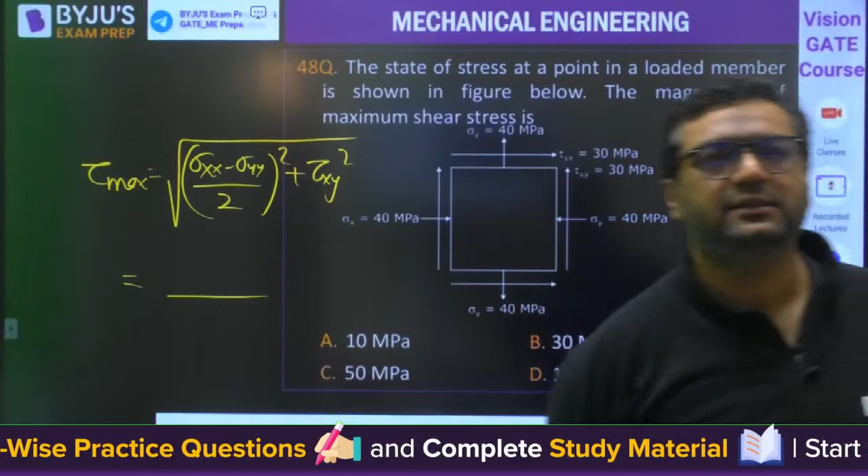Okay. So question number 48, guys. The magnitude of maximum shear stress. You already know tau max formula. It is going to be square root of sigma xx minus sigma yy by 2 whole square plus tau xy whole square. Solve this one, guys. Two more questions.

So answer will be coming out to be what? You can see sigma xx is minus 40, sigma yy is plus 40. So minus 40, plus 40. Tau xy is this. C is the right answer. Hey, this is compressive, and this is tensile. So answer should be 50. You have put the values wrong.

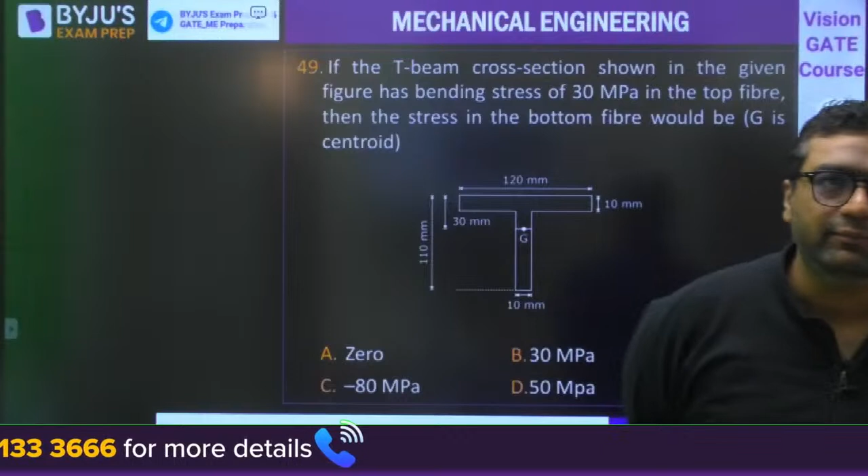2 more questions to go. Question number 49. Second last question. This is the T section. They have given that 30 MPa is in the top fiber. What is the stress at bottom fiber? You know, bending stress is directly proportional to Y. Give your answer accordingly.

They are asking you the stress at bottom fiber. This is the centroid. This is the distance of top fiber, distance of bottom fiber. Total is 110. This is 30. So this will be 80. So you can write sigma B of top by sigma B of bottom equals Y of top by Y of bottom.

So sigma B of top is given 30. This you need to calculate. Y top is 30, Y bottom is 80. So answer will be minus 80 because if top fiber is in tension, bottom will be in compression. Answer will be C, minus 80 MPa.

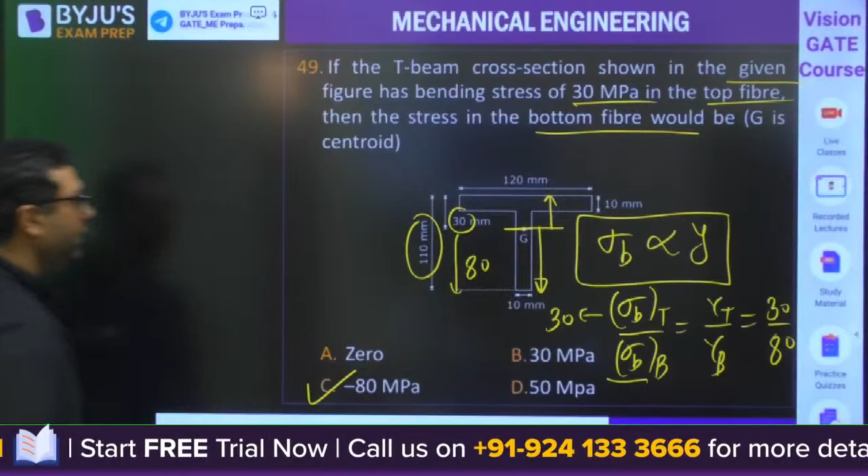So guys, the last question from my side from SFD BMD. So today I have taken more time because I was explaining every question to you and also some slight delay in the starting we have seen. One question I have given you as homework that I need answer in the comment section. That is a good question actually. Okay, so you can tell the answer for that. If you find it is more than one option, it's fine. You can tell that this and this will be answer.